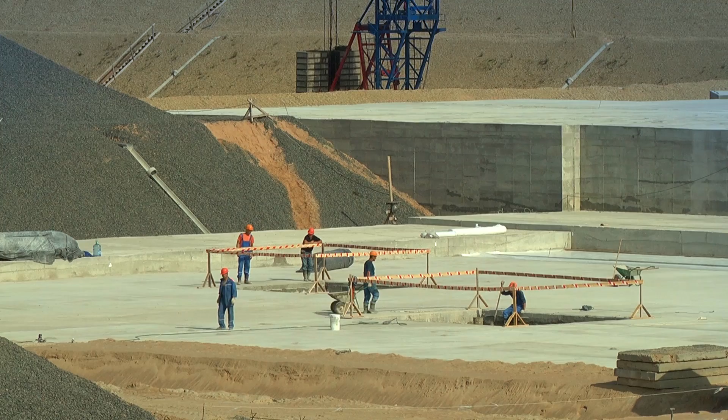The startup of the first power-generating unit of the Belarusian nuclear power plant is planned for 2018. The second one is to be put into service in 2020. The design output power amounts to 2,400 megawatts. That approximately equals a quarter of the Republic's power demands.

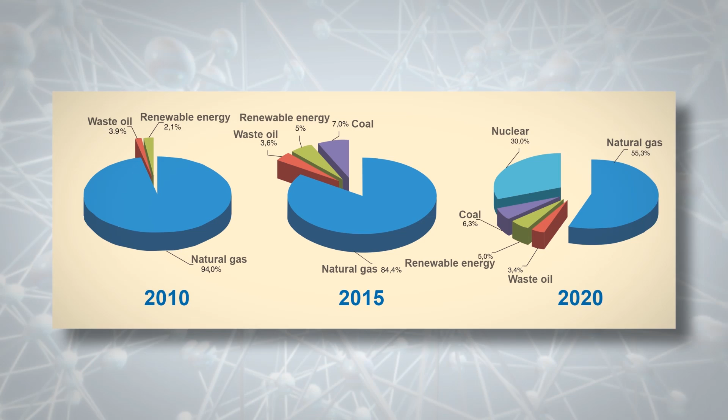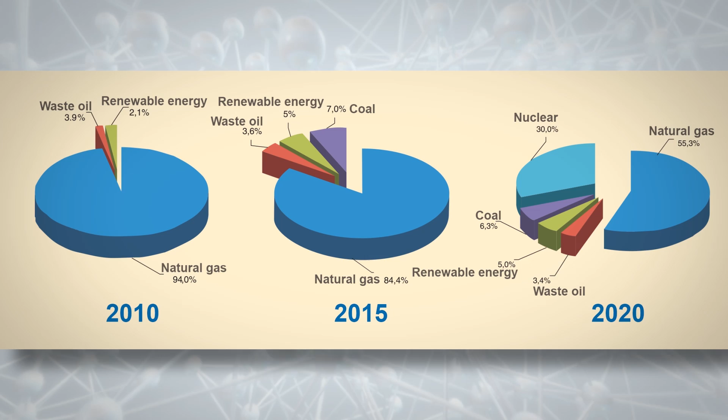The use of nuclear fuel in terms of the power balance will allow the replacement of a significant proportion of organic fuel, including 5 billion cubic meters of natural gas per year. That means that discharges of greenhouse gases will be reduced by about 10 million tons per year. At present, activities on the construction site run on schedule.

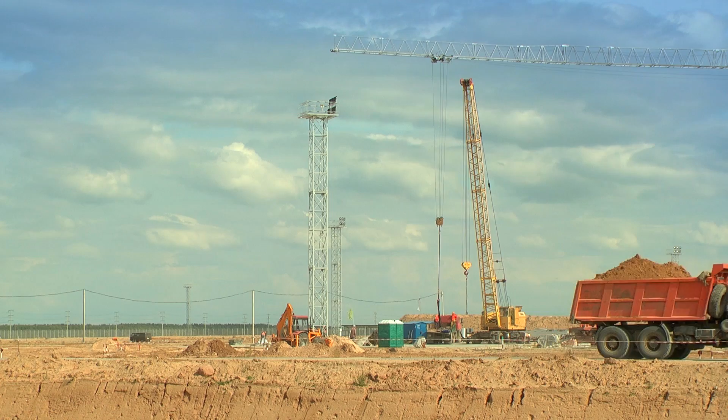Currently, preparatory work is being done, including the construction of a production base for use during the main stage of work. Basic objects are also being prepared, including the excavation of the foundation and the laying of the first layer of concrete. The construction of the first foundation pit for the first power-generating unit has been completed, while the foundation pit for the second power-generating unit is nearing completion.

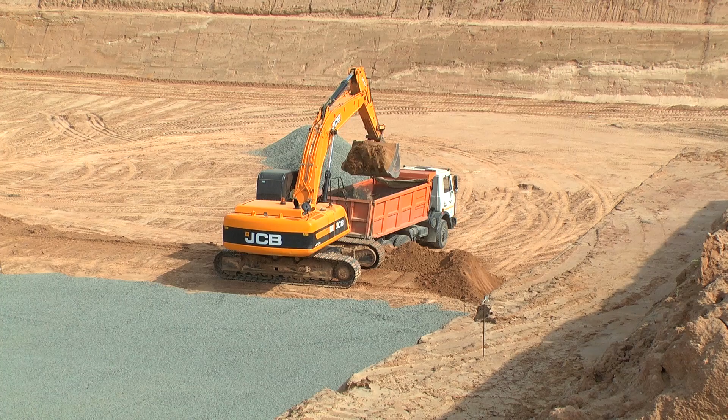The project is taking international experience in the development of nuclear energy into account. The security systems that will be used at our station meet all the current regulations and standards. The design takes all of the natural and anthropogenic factors into account that could disrupt the safe and reliable operation of a nuclear power plant. The project also takes into account the lessons learned from Chernobyl and Fukushima.

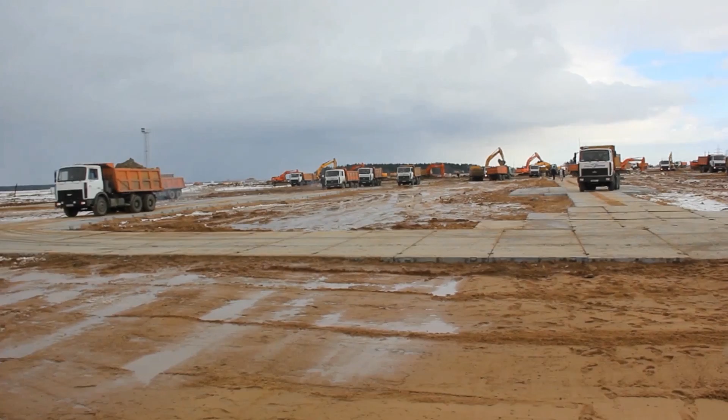Of all the options available in the world market, the Republic of Belarus chose the design offered by the St. Petersburg Research and Design Institute. This is an advanced 3+ generation design with a VVER-type reactor. Its main distinguishing feature is the use of additional passive safety systems in combination with conventional active systems.

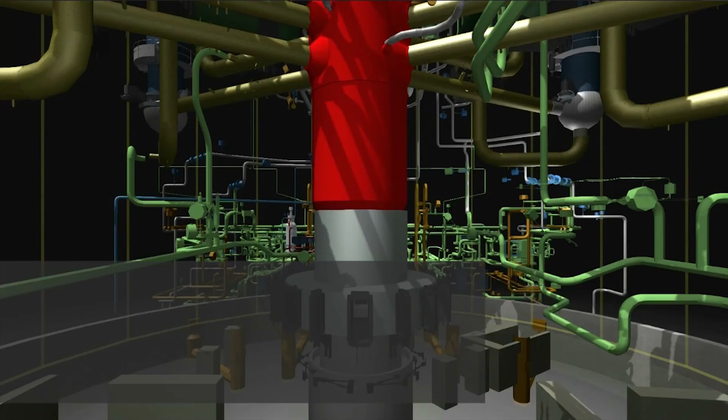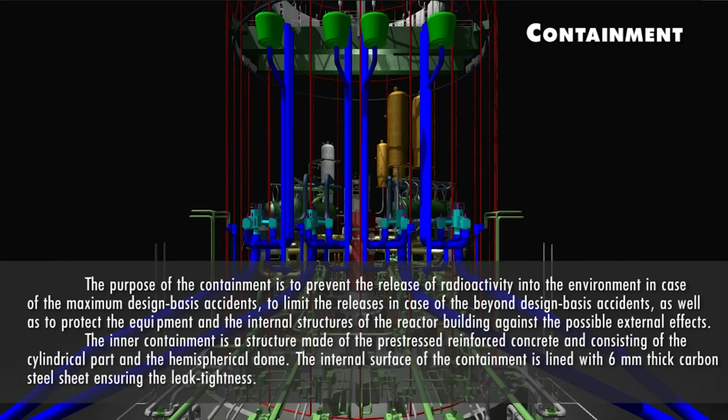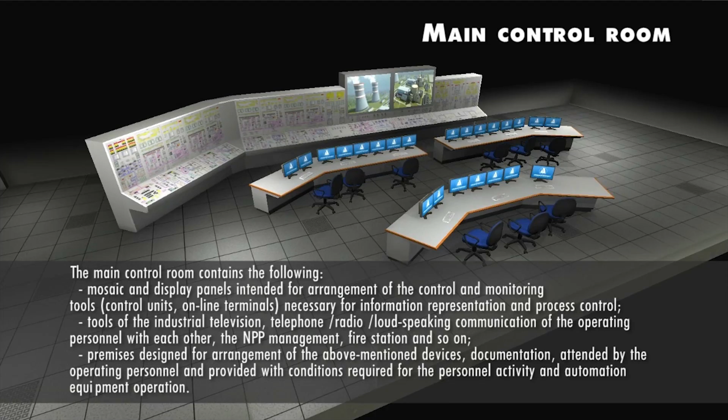The design comprises protection against earthquakes, tsunamis, hurricanes, and aircraft crashes. Examples of major improvements include a double containment of the reactor, a core catcher to be arranged under the reactor pressure vessel, and a passive system of residual heat removal. Nowadays, 24 nuclear power plants of the VVER type are under operation in Russia, Ukraine, Bulgaria, and the Czech Republic.

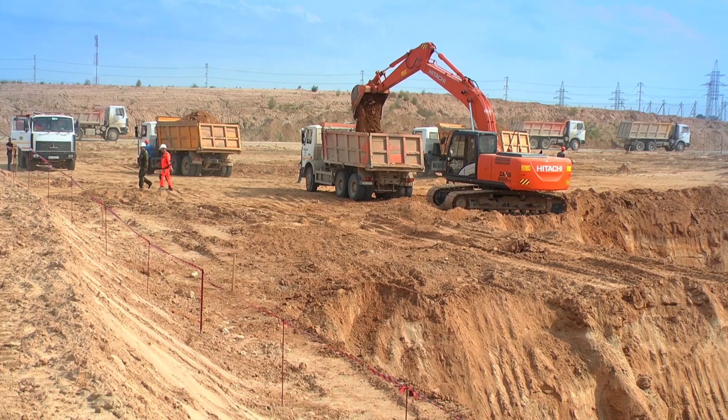The site selection was carried out in accordance with all of the IAEA's regulations and recommendations. In 2006, 3 of the most promising sites not subject to prohibitive factors were stated for the power plant location, namely Ostrovets site as a priority one and Kukshinovskaya and Krasnopolyanskaya sites as reserve ones. In December of 2008, on the grounds of fundamental analysis of the hydrological, seismic, tectonic, ecological and other 10 factors, the site at Ostrovets was put in pole position.

The Republic of Belarus has been a signatory of the Convention on Environmental Impact Assessment for many years. In accordance with the Convention, a report has been prepared on the environmental impact of the Belarusian nuclear power plant. Information about the report was sent to neighbouring states in the framework of this convention that are parties to it: Austria, Latvia, Lithuania, Poland and Ukraine, as well as Russia, which isn't a member of the convention.

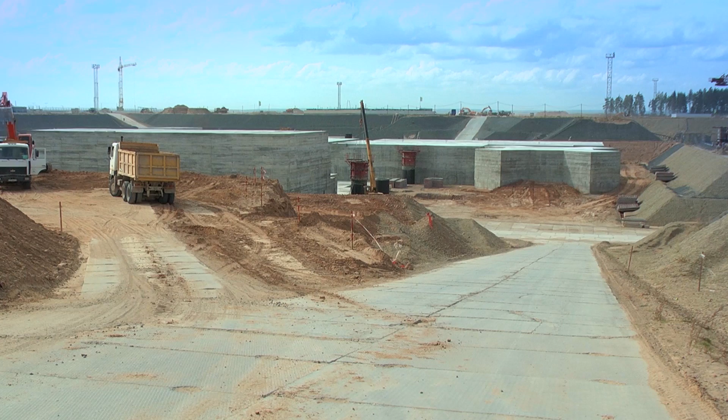The Belarusian nuclear power plant project has successfully completed its state environmental review. We can safely say today that the Belarusian nuclear power plant is safe and reliable. Top priority was placed on ensuring a reasonable environmental impact and environmental conservation. At this stage, preparatory work is being carried out at the construction site.

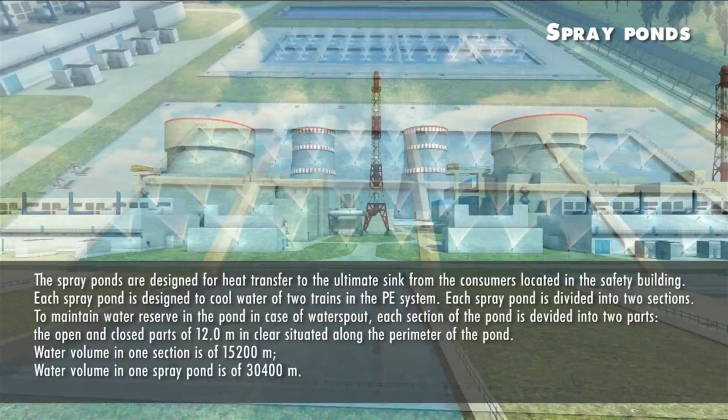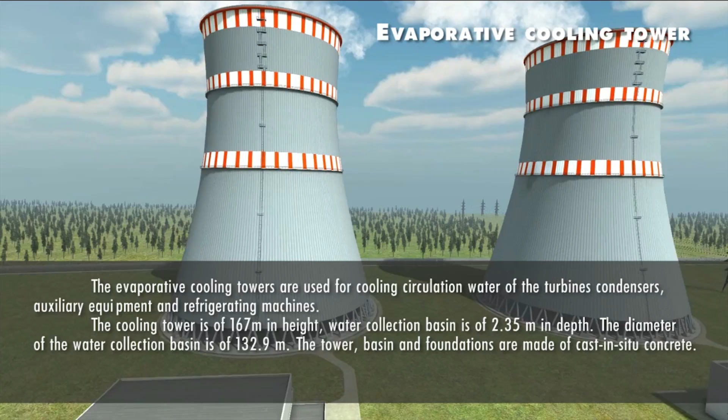An environmental monitoring system is already in place that measures the slightest changes in the environment. The Belarusian nuclear power plant project has been designed to minimize the environmental impact of the station on the surrounding area. The Belarusian nuclear power plant. Ecological safety, first and foremost.